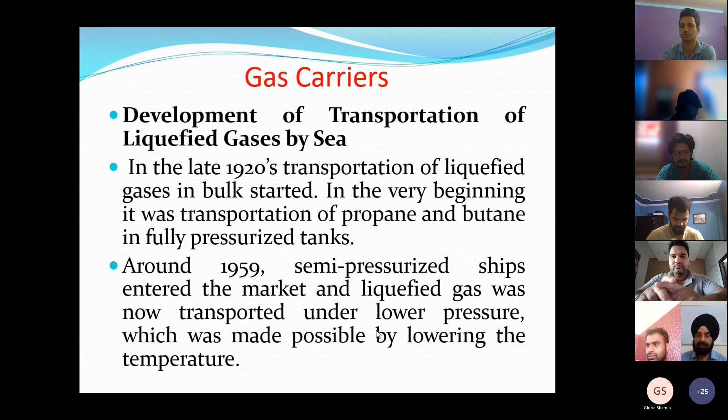So if you see the development of transportation of liquefied gases by sea, it started in the late 20s, and in the beginning only propane and butane were transported, and that too in fully pressurized tanks. Around 1959, after research, scientists found that certain gases can be liquefied if you lower the temperature, and then semi-pressurized ships entered the market and liquefied gas was transported under lower pressure, made possible by lowering the temperatures.

By 63, fully refrigerated ships for LPG, LNG and certain chemical gases were in service carrying cargo at atmospheric pressure but very low temperatures. So liquefied gas is divided depending upon these properties, and different groups of gases have led to different types of gas carriers. Certain gases are liquefied under high pressure, certain gases under low temperatures. That's why you have different types of gas carriers: some fully pressurized, some semi-pressurized, some fully refrigerated.

And as the development took place, the sea transport of these gases is internationally regulated with regard to safety through standards established by IMO. And these standards are set out in the gas carrier codes. So we all know that today you have codes on almost everything. But here in this gas carrier code, they give you everything, right from the design, construction, safety measures. And I feel today these ships are much safer as compared to other ships.

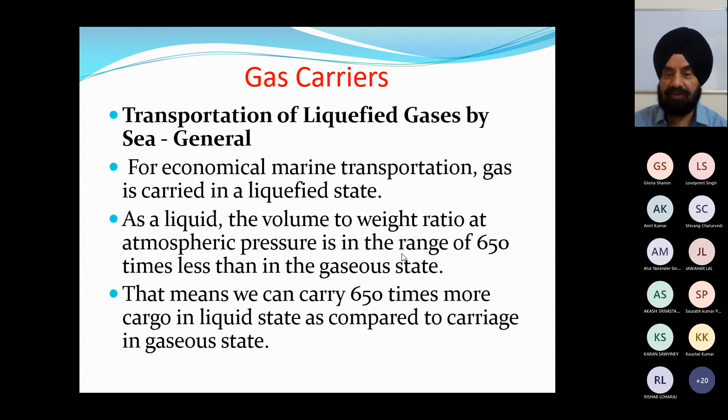Now if you see, for economical reasons, marine transportation of gas is carried in a liquefied state. If we had to carry this in a gaseous state, we would need very big ships. As a liquid, the volume to weight ratio at atmospheric pressure is in the range of 650 times less than the gaseous state. So again, the scientists did all this hard work, and today we can carry these gases in a liquefied state onto the ships, and that's how our life goes on. So this means we can carry 650 times more cargo in liquid state as compared to carriage of these gases in a gaseous state.

Now for these gas carriers, the temperature at which a gas condenses is a function of its pressure. And the combination of pressure and cooling is therefore fundamental to gas carrier design. That's how we liquefy this gas. Some ships carry gases liquefied under pressure and others under refrigeration. And also if you notice, the relative densities of these gases are low, varying from 0.4 for methane to 0.97 for VCM, vinyl chloride monomer, which is used in the manufacture of plastic. Cargo carrying capability is therefore more related to the volume capacity of the ship than the deadweight capacity.

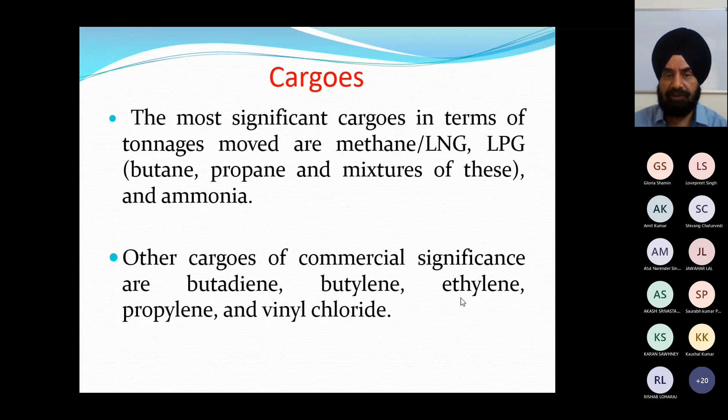Significant cargoes in terms of tonnage: LNG, LPG, butane, propane, ammonia, and other cargoes, of course, butylene, ethylene, propylene, and vinyl chloride. So apart from ethylene and methane, and what we call LNG is mostly methane, all these gases can exist as liquids at normal temperatures, whereas these gases are liquefied at very low temperature, -161 degrees centigrade. Now you can just imagine LNG ships carrying this liquefied gas at -161 degrees centigrade. So thinking of it, what type of material, how they must have constructed the tanks, and how this gas is liquefied under low temperatures.

Of course, technology is there today, and they may therefore be transported in pressurized cargo containment systems at any temperature up to the highest expected ambient temperature. So critical temperatures for ethylene and methane are below normal ambient temperatures, as I told you, -100, -160. And above the critical temperature, the gas cannot be turned into a liquid at any pressure and must therefore be cooled. That's why these gases are carried under various carriage conditions, either fully pressurized, semi-pressurized or fully refrigerated. And similarly, ethylene, methane or LNG are carried under fully refrigerated conditions because temperatures are -104 and -161.

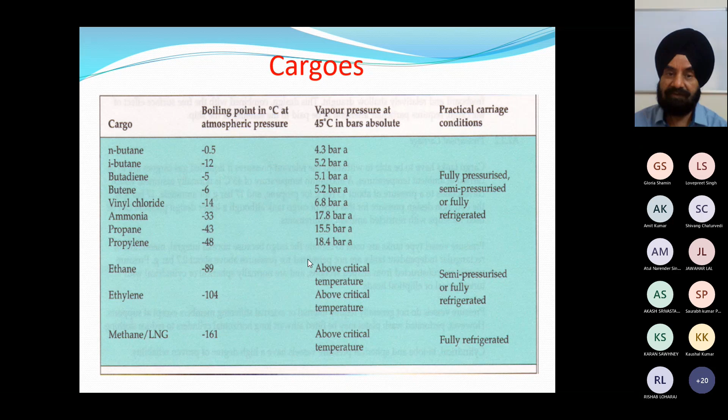And similarly, materials exposed to these gas cargoes should be resistant to any corrosive action of the gases. For this reason, copper alloys and brass have to be excluded from the cargo systems of ships intended for the carriage of ammonia. They have corrosive effects, and details of materials of construction which should not be used are in Chapter 17 of the IGC code. Everything is given there. Of course, people who build these things take care. They are intelligent, genius people who build the ships.

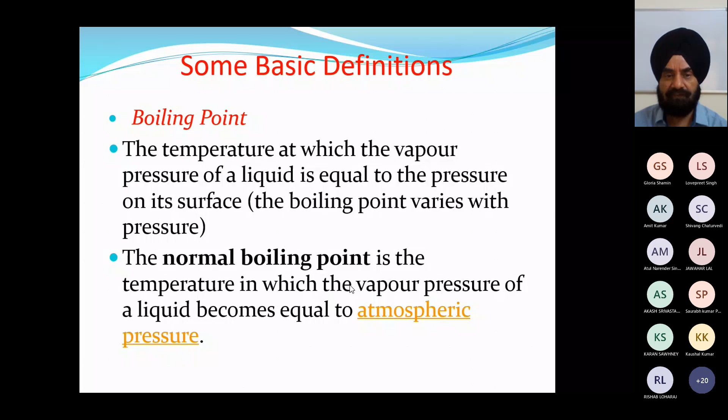Now, some basic definitions. Gas, again as per the gas carrier code, a liquid with a vapor pressure exceeding 2.8 bar absolute at a temperature of 100 degrees Fahrenheit is normally what we term a gas. Boiling point, as we all know, is the temperature at which the vapor pressure of a liquid becomes equal to atmospheric pressure. Cargo area, we all know, as compared to tankers, what is cargo area, what are safe zones, what are hazardous zones. And similarly, cargo containment systems are basically your tanks: the arrangement for containment of cargo, including where fitted primary and secondary barriers, associated insulation, and inter-barrier spaces.

Basically, in a very layman's term, the gas carrier is like a thermos flask. The inner barrier, the outer barrier, and in between there is insulation so that there is no temperature change. So it is based on that design, and of course we see all these primary and secondary barriers and the insulation in between. Gas dangerous space: all the deck area where your tanks, pumps, compressors, reliquefaction plant, everything is situated is known as the gas dangerous zone. And gas safe zone is space which is not designated as a gas dangerous zone.

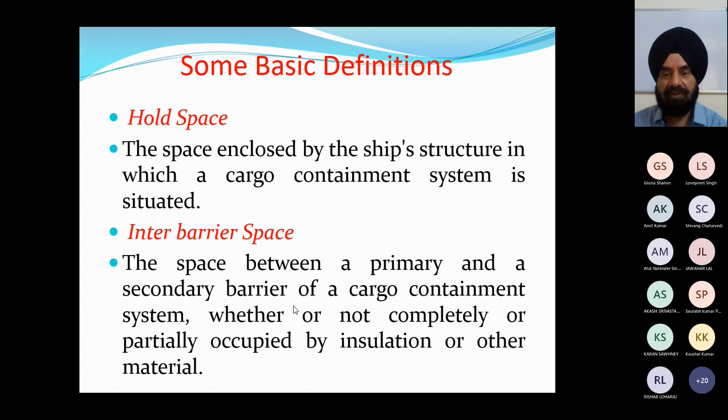Hold space and inter-barrier space. Again, if you see, these tanks are kept inside your hull, so naturally the hull is not forming a tank boundary. So the space between this tank and the hull is normally what we call the hold space. And inter-barrier space is between a primary and secondary barrier of a cargo containment system, whether or not completely or partially occupied by insulation or other materials.

MARVS, abbreviation for maximum allowable relief valve setting on the ship's cargo tanks, and these settings are normally stated in your ship's certificate of fitness. Primary barrier, like the thermos I told you, primary and secondary barriers. If you look at these tanks, this is the tank kept inside your hold space. Primary barrier, where you are loading the cargo, the inner layer, and again insulation is there, and in case the cargo leaks, finally you have the hull acting as a secondary barrier, and cargo should not go out. That is the whole issue. So that's why you have this primary and secondary barrier.

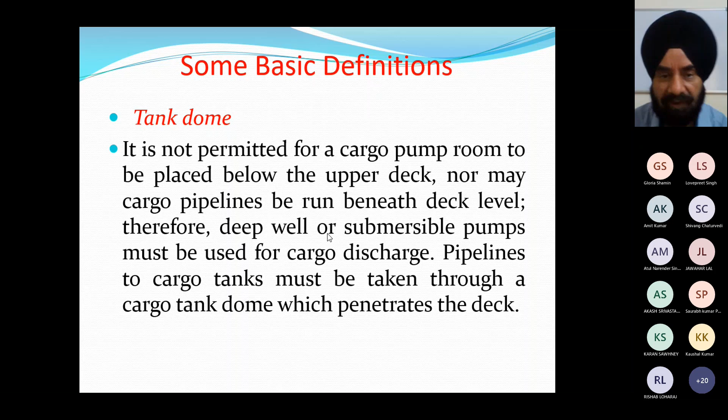Tank dome: of course all the pipelines, everything is fitted on deck. There's nothing under deck. Pumps are inside the tanks, and all these pipelines basically pass through what we call the tank dome. They are taken through the tank dome, which penetrates the deck.

Now comes the hazards. It can also be a common question. First of all, any cargo I am carrying, I should be aware of the hazards of that cargo. First of all, with this, personal hazards: flammability, toxicity, asphyxia, low temperature, frostbite.

When we are carrying these cargoes at such a low temperature, you can imagine even minus 50 degrees is a low temperature, and when we are carrying at minus 161, if a drop of that cold liquid falls onto any part of the body, we can imagine what can happen. It is worse than a hot burn. Chemical burns, we all are aware.

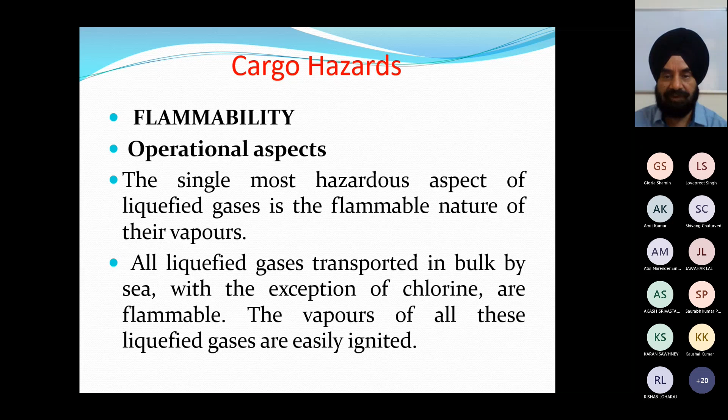The flammability, very simple thing. Whenever we carry these liquefied gases or even oil, the first thing that comes to mind is, of course, this will be flammable. And the single most hazardous aspect of these gases is the flammable nature of their vapors. We also know it's not the liquid which burns, it is the gas. The liquid gets converted into vapor, mixes with oxygen, and then combustion takes place. And the vapors of all these liquefied gases are very easily ignited. The exception is ammonia, which requires a little higher ignition energy.

Emergency aspects: because of very rapid evaporation of spilled liquefied gases, the flammable vapor spreads. If we just spill this liquid, it is immediately going to get converted to vapor. Even people who have carried naphtha on product carriers have seen how quickly it vaporizes. So liquefied gases get converted immediately into vapor, and the chance of ignition following a spill of liquefied gas is therefore much greater.

So that's why you find all terminals and ships, wherever you are working, are totally ignition-free zones. And by working on tankers or these ships, it becomes our nature that we do not allow any spark or any flame to come close to these areas.

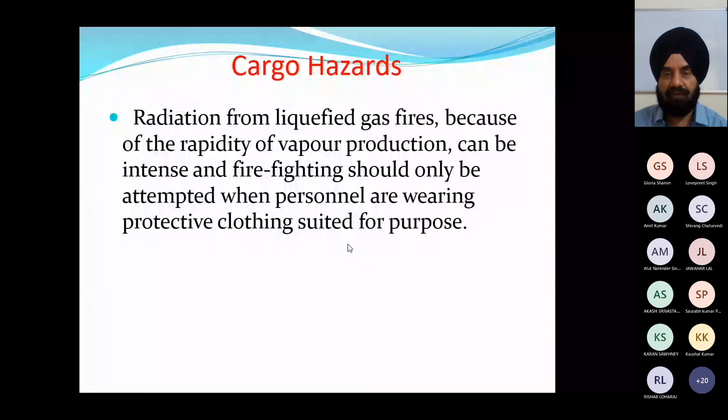Radiation from liquefied gas fires, because of the rapidity of vapor production, can be intense. So we cannot go and fight the fire in normal conditions as we do with other solid fires. So again, firefighting needs proper protective clothing. In case we come across such a situation, God forbid, before attempting we should have in mind that these are vapors and they spread very fast.

Toxicity, I think we all know; we have studied in chemicals the same effect of toxicity on human health. It can cause a permanent health hazard, irritation, tissue damage, impairment, and these can result from skin or open wound contact, inhalation or ingestion. Contact with cargo, liquid or vapor, should be avoided. Protective clothing is most important, and toxic gas detection equipment.

Asphyxia, very common with these gases. The human body requires 21% oxygen. So this asphyxia is just suffocation.

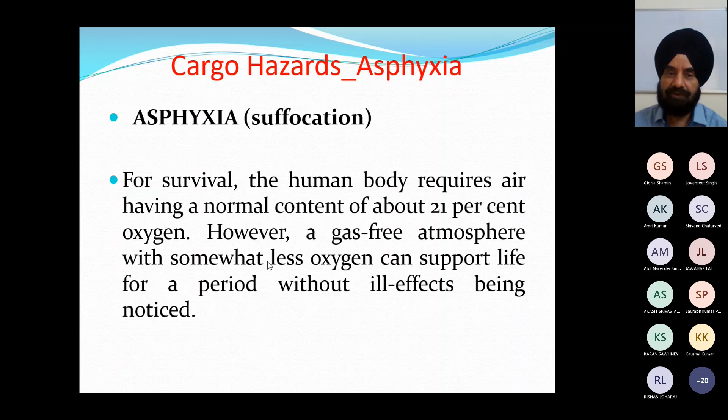So these gases, what do they do? They basically replace your oxygen. And if there is a deficiency of oxygen, you know what can happen to us. Susceptibility of persons to reduced oxygen levels varies, but at levels below about 19%... now we know we need 21% oxygen. At a little lower level, 20, 19, we can still survive, but you can start feeling the effect of this low oxygen, especially when you go to very high altitude. There also some people face a breathing problem because of the lower percentage of oxygen. So the same thing is here.

So in case the oxygen level goes below 16%, unconsciousness immediately takes place. So these gases have this effect when you are carrying them in any space. Oxygen is replaced, there is no oxygen. So the asphyxiant effect is very much present with these gases. Such a problem is limited to enclosed spaces.

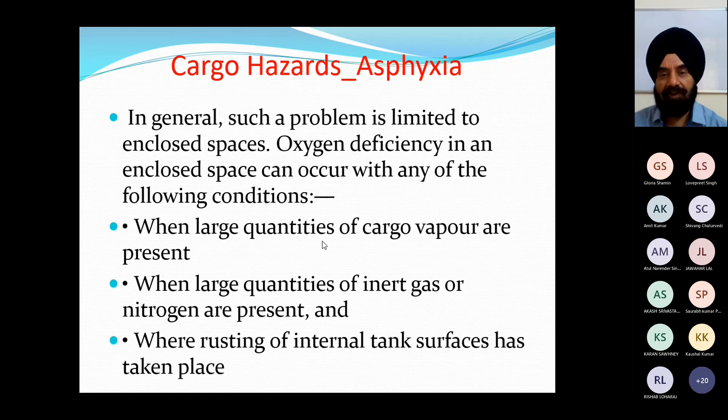Oxygen deficiency in an enclosed space can occur when large quantities of cargo vapor are present, large quantities of inert gas or nitrogen are present, and where rusting of internal tank surfaces has taken place. So when tanks are empty, they may be in an inert condition, or when they are full, they may be full of these gas vapors. So it is essential to prohibit entry to any space until the oxygen content is 21% at different levels and widely dispersed within the space.

Now, of course, this is asphyxiation and medical treatment. I think you have studied enough in the first aid or MFA or medical care courses about what to do in case a person is suffering from the loss of oxygen. So the first thing is to remove the casualty to a safer area where he can get more fresh air.

Now another effect is anesthesia. The anesthetic effect is also there. What is anesthesia? It is simply loss of consciousness, the effect on the nervous system. As medical officers on ships, we all know what anesthesia is. If we have to do some repair on the human body, we definitely give anesthesia, local anesthesia. If you want to do stitching also, the doctors give this. So these gases have the same effect of anesthesia, loss of consciousness due to the effect upon the nervous system. The unconscious person may react, but can only be roused with great difficulty. Again, this can be avoided by use of cargo vapor detection equipment and breathing apparatus.

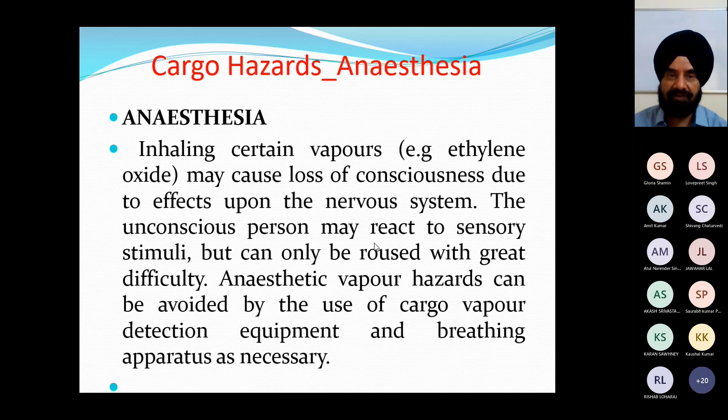Frostbite: the extreme coldness of some of these liquefied gases is a significant hazard. And it is quite dangerous. It's not that it gives you only a burn; your cells start dying, and we get gangrene, and then that particular part may need to be amputated. So frostbite is a very dangerous thing, so better we take this hazard very seriously. For fully pressurized gases, while the containment system will normally be at or near ambient temperature, liquid leaks will quickly flash to fully refrigerated temperature. Such areas should never be approached without proper clothing.

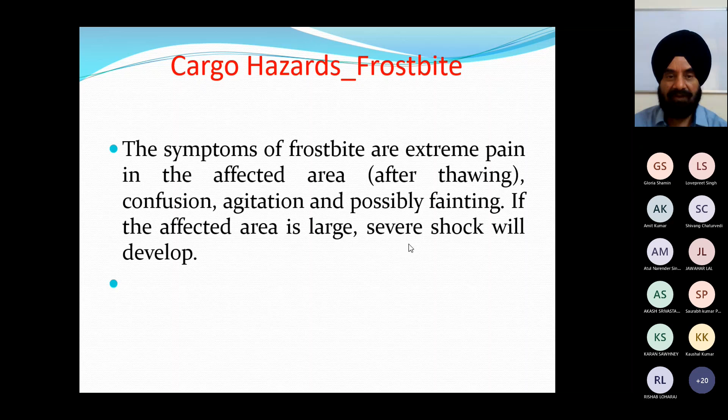Symptoms of frostbite: extreme pain, confusion, agitation, and possibly fainting. And if the affected area is large, severe shock, and it can even cause death. Frostbite is common; a lot of engineers suffer when they're handling the refrigeration system on the ship, if they touch a very cold pipeline. So they see these cold burns. Similarly, the skin initially becomes red, then turns white. The affected area is usually painless, hard to touch, and if left untreated, the tissue will die and gangrene may occur.

And of course, treatment is to warm the area, warm the particular affected portion. Blisters should never be cut nor clothing removed. Dress the area with sterile gauze. And of course, immediate medical attention. But the worst thing is if it is left untreated, thinking it will get better on its own. The tissue or cells dying, that gangrene is a very dangerous disease. It needs amputation to save the body.

Chemical burns: we are also exposed to ammonia, chlorine, ethylene oxide, and propylene oxide. Their symptoms are similar to burns by fire, except the product may be absorbed through the skin. Ammonia is a gas. I went on one of the ships, and the ship was full of that ammonia smell.

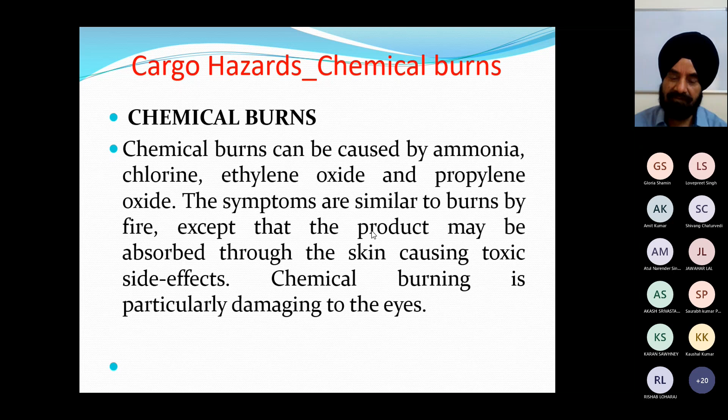Again, burning pain, redness of the skin, irritating rash, blistering of skin, and toxic poisoning, all associated with ammonia. Treatment - eyes and skin should be attended to first. Wash with copious amounts of water, wash the skin thoroughly. On gas carriers authorized to transport these products, that's why you have deck showers and eye baths provided for water dowsing. Their location should be clearly indicated. In case of emergency these things become important - as a chief officer you must ensure these systems are working properly. Of course we don't expect anything happening, but God forbid something happens, the amount of water available through deck showers is the first thing needed to wash the affected area. Those were the personal hazards.

Now if you see the other hazards as compared to what we have studied in the chemical tankers, here also we have reactivity.

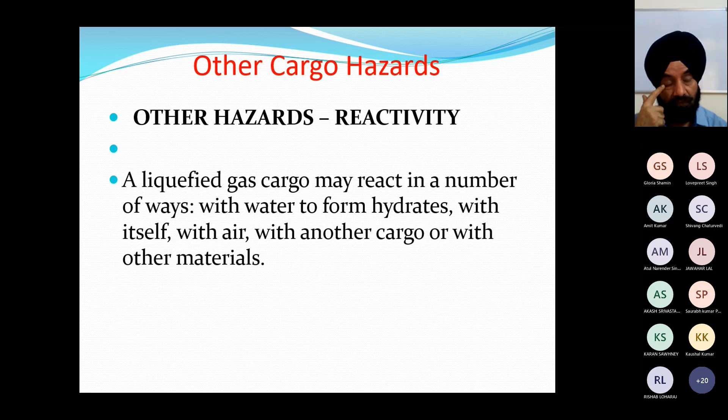Liquefied gas cargo may react in a number of ways. It can react with water to form hydrates, which is again not a good thing. So you can imagine, in a tank when we are carrying these gases at such low temperature, if there are a few drops of water, they can freeze - this is known as the formation of hydrates. These crystal formations can definitely be damaging to the pumps, bearings, anything. So the first danger with these gases is reactivity - they can react with water, react with air, or react with another cargo or other materials, similar to chemical tankers.

Reaction with water - some hydrocarbon cargoes will combine with water under certain conditions to produce a substance like a hydrate, resembling crushed ice or slush. Water for hydrate formation can come from purge vapors with an incorrect dew point, water in the cargo system, or water dissolved in the cargo.

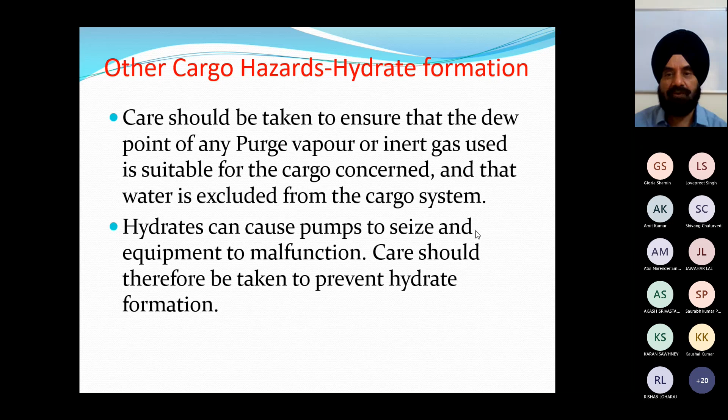Care should be taken to ensure that the dew point of any purge vapor or inert gas used is suitable for the cargo concerned, and water is excluded from the cargo system. Otherwise hydrates can cause pumps to seize and equipment to malfunction. We'll see how these things are taken care of through procedures before loading takes place - what all things are done to get rid of any water present in the tanks.

Certain cargoes like LPGs may contain traces of water when loaded. It may be permissible in such cases to prevent hydrate formation by adding small quantities of antifreeze. Of course, anything related to the terminal - normally we don't add anything to the cargo ourselves, it is the shipper or the terminal who has to do it. It is permitted, it should be introduced at places where expansion occurs with a resultant lowering. Antifreeze additives are often flammable and toxic, so care should be taken. Of course, on the ship we don't mix anything with this.

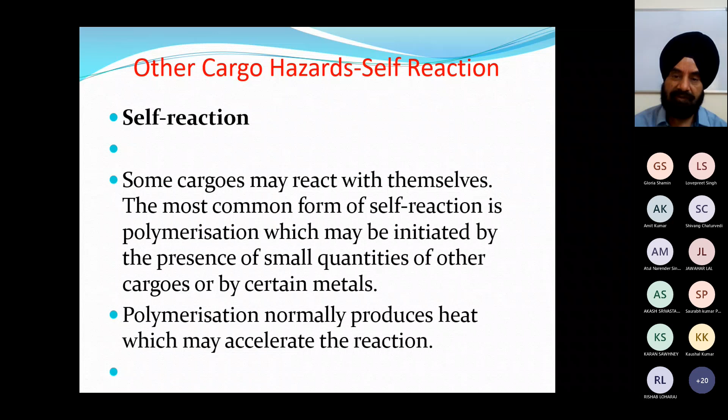Self-reaction - some cargoes may react with themselves. The most common form is again polymerization. These are liquid cargoes - if you consider, these are gases but they have been liquefied, now it's a liquid, so they can have a self-reaction. Self-reaction is a vigorous polymerization which may be initiated by the presence of small quantities of other cargoes or by certain metals. Polymerization, as we have studied, produces heat which can accelerate the reaction, and then the temperature and pressure go up.

Now if these cargoes are such, the solution for how to carry them is again under an inert gas blanket, or to be inhibited - an inhibitor is added so that this reaction doesn't start. And if it is done, you should have data on what is the quantity and type of inhibitor added and how long its effectiveness will last. Also the action to be taken should the voyage exceed the effective lifetime of the inhibitor, and any temperature limitations. Of course there is no need to add anything during the voyage - if it should become necessary, it should be done according to the shipper's instructions. So we don't touch this cargo, we don't want to spoil it, and we don't have the means on the ship to do it anyway.

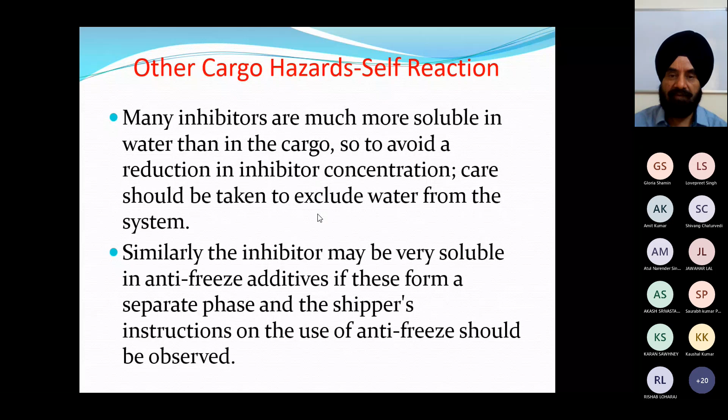This is similar in too much detail to what we have studied in chemical cargo - same thing, reaction with air. This is also very much possible with these liquefied gases, and they can react with air to form unstable oxygen compounds.

The rectification for this is how we carry cargo under nitrogen. Removing oxygen - we are very much thorough with inert gas, but normally we don't use inert gas, we use pure nitrogen, so the chances of reaction with oxygen are absolutely reduced.

Reaction with other cargoes, of course, certain cargoes can react dangerously with one another. They should be prevented from mixing, using separate piping, vent systems, even their vapors. Every tank has an individual venting system so that no two cargoes' vapors mix and create any disaster on the ship.

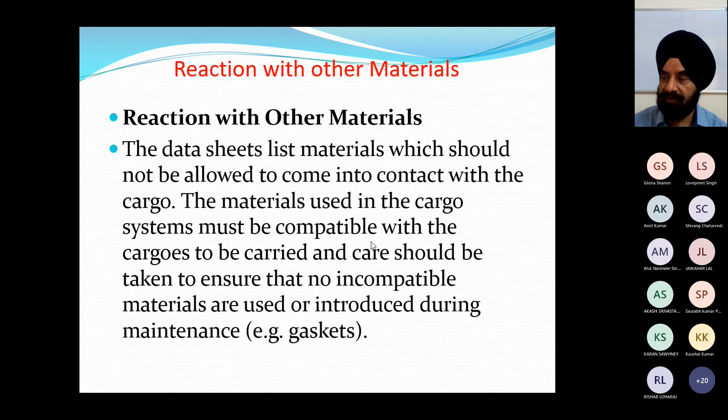Data sheets list materials which should not be allowed to come in contact with the cargo. MSDS sheets clearly give materials used in cargo systems that must be compatible with the cargoes to be carried, and care should be taken that no incompatible material, like gaskets, pump seals, anything used for maintenance, is made in such a way that it reacts with these liquefied gases.

Reaction can occur between cargo and purge vapors of poor quality. Inert gas with high CO2 content can cause carbonate formation with ammonia. Reaction can also occur between compressor lubricating oils and some cargoes. So for this, inert gas is probably replaced with nitrogen so that no carbonate formation takes place.

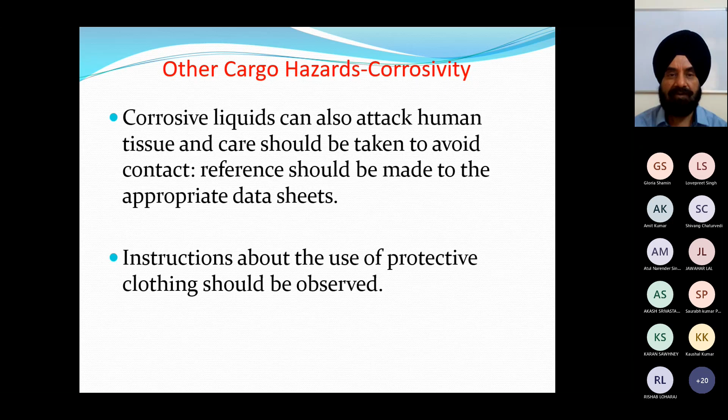Corrosivity - some cargoes and inhibitors may be corrosive, so care should be taken to ensure unsuitable materials are not introduced. Corrosive liquids affect both human tissue as well as equipment. During building time, they take care of what all cargoes the ship is carrying, authorized and approved to carry, and for touching these corrosive liquids, proper protective clothing is the solution.

Low temperature effects are also there. The liquefied gas cargoes are often shipped at very low temperatures, so important temperature sensing equipment must be well maintained. A lot of sensors and gauges are on these ships, and they have to work to maximum accuracy. A low temperature effect is brittle fracture.

I can imagine if minus 100 or minus 150 degree liquid falls on deck, it will immediately cool the deck or steel to such a low temperature that the metal becomes brittle. What is brittleness? It just breaks.

And that's why steel decks, when this so-called liquid falls on the deck, it can create brittle structure, brittle fracture. Normal shipbuilding steels rapidly lose their ductility and impact strength below 0 degrees. So you can imagine the material used for construction of tanks to carry these liquefied gases at such low temperatures.

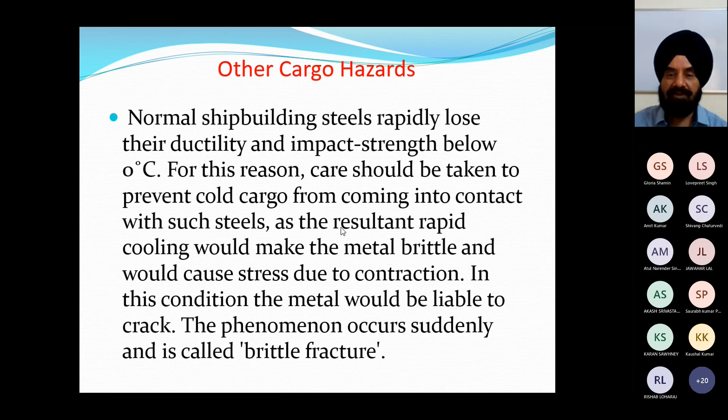For this reason, care should be taken to prevent cold cargo from coming into contact with such steels, as the resultant rapid cooling would make the metal brittle and cause stress due to contraction, and in this condition the metal will be liable to crack. So this is a precaution we have to take, that these cold cargoes do not spill on deck, and if they spill, there are chances the metal becomes brittle and can crack.

Spillage - we must avoid hazard to personnel and danger of brittle fracture. If spillage does occur, the source should first be isolated and the spilt liquid then dispersed. Cool down - systems are designed to withstand a certain service temperature. If this is below ambient temperature, the system has to be cooled down to the temperature of the cargo before transfer.

We will see how these tanks are cooled down. From ambient temperature, if I am going to load cargo at even minus 100 degrees, we just cannot put this cargo into the tanks directly - thermal stresses will take place, brittle fracture can take place.

So these tanks are normally cooled at about 10 degrees per hour. You cannot cool immediately - sudden cooling also causes a lot of thermal stresses. So we'll see during the procedures of cargo operations how this cooling of tanks is done.

Ice formation - low cargo temperatures can freeze water. As we have seen with hydrate formation, to avoid that, antifreeze or similar substances can be added.

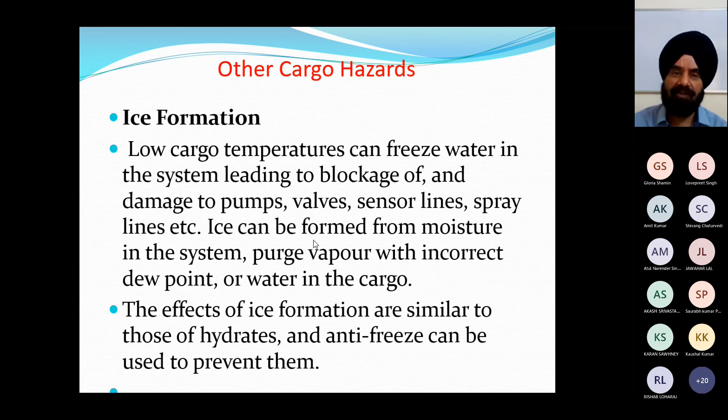Now the biggest thing is rollover, which is associated with these cargoes, and this is an important exam question. A lot of the time in the writtens and even in orals, the examiner probably will ask you what rollover is. Now, rollover is a very simple thing to understand - you are carrying these liquefied gases in a tank.

Now with a slight temperature change, vaporization starts, what we call the boil off. This liquid starts vaporizing - the term used is boil off. Now as the top surface, the top layer of the liquid vaporizes, the density of that top layer changes. It becomes denser and denser, and sometimes these cargoes have a lot of impurities, which start vaporizing very rapidly, making the top layer a little denser compared to the layers beneath. This layer formation is what we call stratification.

Now the stratification develops - the liquid layer adjacent to the liquid surface becomes denser than the layers beneath due to the boil off of a lighter fraction from the cargo. Especially with LNG methane, which has a lot of impurities, these impurities immediately boil off and vaporize, and the top surface of the liquid becomes denser.

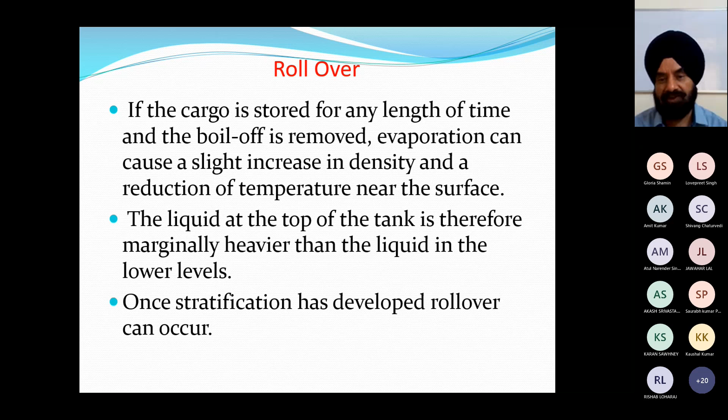If the cargo is stored for any length of time and the boil off is removed, evaporation can cause a slight increase in density and a reduction of temperature near the surface. So the liquid at the top of the tank is therefore marginally heavier than the liquid in the lower levels. This layer formation, or stratification, has developed and rollover can occur.

Now what is the solution for this? This inversion will be accompanied by a violent evolution of large quantities of vapor and a very real risk of tank overpressure.

Rollover has been experienced ashore also, but may happen on a ship that has been anchored for some time. That means this rollover can take place when your cargo is almost stationary, not moving. It can happen - like if the ship is stationary at anchor, then there is a possibility.

So for its prevention, such circumstances are foreseen. The tank content should be circulated daily by cargo pumps to prevent this rollover from occurring. So if the cargo is recirculated, then there are no chances of this layer formation. So this is basically rollover - what it is and how it can be avoided.

It can also occur if similar or compatible cargoes of different densities are put in the same tank. That can also happen.

So these were our hazards - personal and reactivity hazards, and rollover. Now we come to gas carrier types. What are the various gas carriers? This question also comes in exams. Simple - even if you have not been on a gas carrier, it doesn't make a difference. We can definitely answer this question: gas carriers can be grouped into 5 different categories.

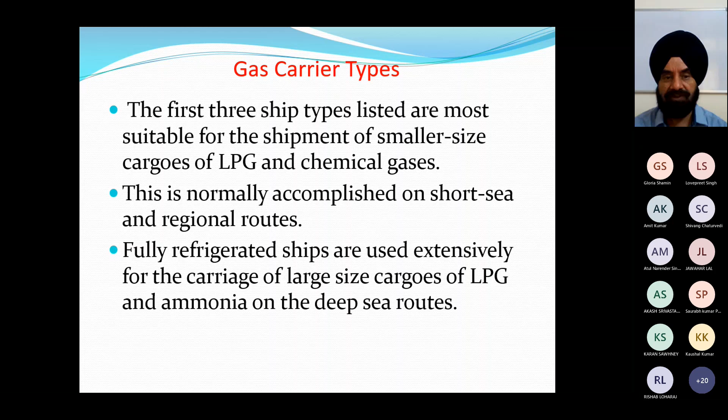Now, the first 3 types listed are most suitable for shipment of smaller size cargoes of LPG and chemical gases, normally on short sea routes, and fully refrigerated ships are extensively used for carriage of large size cargoes of LPG and ammonia on deep sea routes.

Now, what are fully pressurized ships? From the word itself we see the cargo is at high pressure. If you have to carry cargo at high pressure, the tank should be of thicker steel, and if you use thicker steel, naturally the tanks will be heavy. So these fully pressurized ships, the simplest of gas carriers, carry cargoes at ambient temperature but at high pressure. The temperature is the same as your LPG cylinder at home. The cargo is at normal temperature, but it is under high pressure.

So they are fitted with type C tanks, what we call pressure vessels, fabricated in carbon steel. These tanks can stand 18 bar gauge. 18 bar pressure means the wall thickness of this material must be sufficient. Few ships in service with higher design pressure can accept up to 20 bar gauge. No thermal insulation and no reliquefaction plant is necessary for these types of ships.

Cargo can be discharged using either pumps or compressors, and because of their design pressure, the cargo tanks are extremely heavy, since they are made of thicker steel. As a result, fully pressurized ships tend to be small, having cargo capacity of 4,000 to 6,000 cubic meters, and are primarily used to carry LPG or ammonia. Ballast is carried in double bottoms, and these ships are fitted with a type C containment system, so no secondary barrier is required.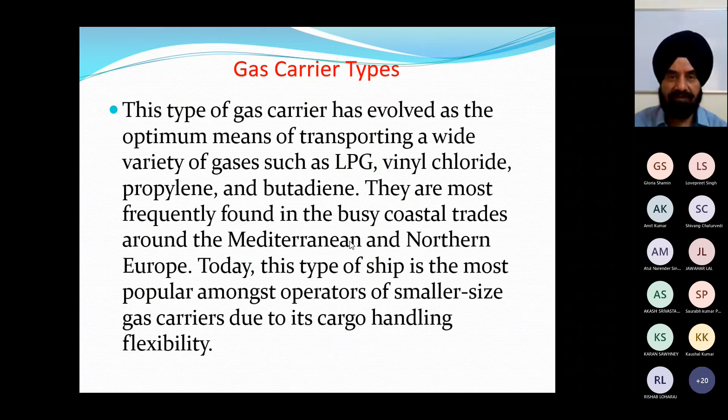semi-refrigerated. This type of gas carrier is an optimum means of transporting a wide variety of gases such as LPG, vinyl chloride, propylene and butadiene, most frequently found in busy coastal trades in the Mediterranean and Northern Europe. These semi-pressurized ships are the most popular among operators. The tanks are type C, which we will see when we study type A, B and C tanks, and therefore do not require a secondary barrier.

Cargo capacities are 3,000 to 20,000, and tanks are usually made from low temperature steels, because we are loading the cargo at low temperatures. So the tank construction should stand low temperature and also a 5 to 7 bar pressure. Normally the material used can easily stand -48, which is the temperature suitable for most LPG and chemical gases.

Alternately, they can be made of special alloy or aluminium to allow carriage of ethylene at -104. Ethylene ships are specially designed so that this cargo is carried at -100 to -104, and to load from both pressurized and refrigerated storage facilities. So that is pressurized and semi-pressurized. The third is ethylene ships. They are often built for specific trades, carrying LPGs or chemical gases.

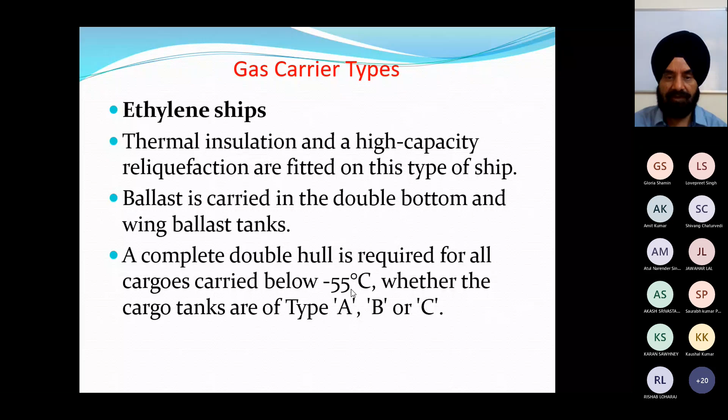Basically, with sudden temperature changes the cargo vaporizes, and to control these vapors we convert them back into liquid; that is a reliquefaction plant. It is possible up to ethylene, but for lower temperatures the plant becomes bigger and bigger. A complete double hull is required for cargoes below -55, whether type A, B or C tanks are carried.

Fully refrigerated ships carry their cargoes at approximately atmospheric pressure and are designed to transport large quantities of LPG and ammonia. Here 4 different cargo containment systems have been used, because they are fully refrigerated, with special metal and special construction: independent tanks with single hull, double bottom and hopper tanks; independent tanks with double hull; integral tanks incorporating a double hull; and semi-membrane tanks.

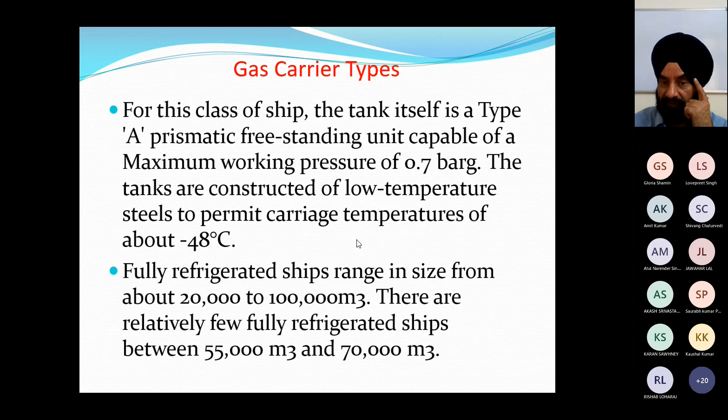For this type of ship, the tank itself is a type A prismatic freestanding unit with a very low maximum working pressure of 0.7 bar. The tanks are constructed of low temperature steels to permit carriage of cargo down to -48, and fully refrigerated ships are bigger, ranging from 20,000 to 100,000 cubic meters, relatively few between 55,000 and 70,000 cubic meters. After ethylene comes LNG; these are also fully refrigerated, but here the temperature is quite low.

Anybody worked on these LNG ships? LNG carriers? Yes, what do you say? Is there anybody who has worked on LNG ships? No one, nobody?

Okay. LNG carriers are specialized types of gas carriers built to transport large volumes of LNG at -162 degrees. So these ships are practically bigger in size, 125,000 to 335,000 cubic meters capacity, normally dedicated to a specific project, and they remain so throughout their life. They carry only between 2 or 3 ports, and they are designed so that they keep feeding that particular plant or project.

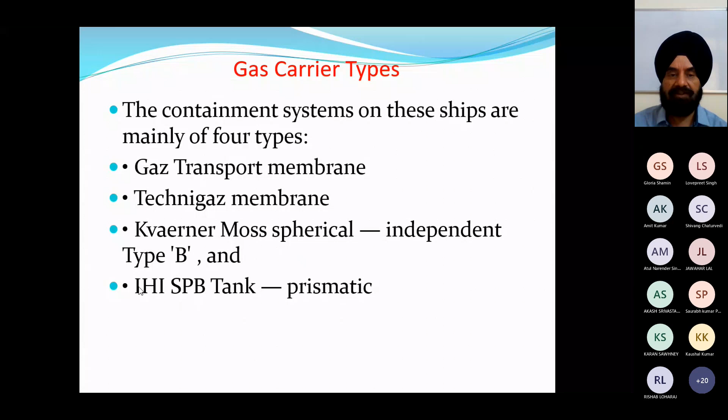The containment system on these ships is basically of 4 types. Containment system means your tanks: Gaz Transport membrane, Technigaz membrane, Kvaerner-Moss spherical, and IHI SPB prismatic tanks. So these are the 4 types of tanks. Of course, the details of the different types of tanks for LNG are there in the IGC code.

So LNG ships have double bottoms or double hulls throughout their cargo length, which provide adequate space for ballast. Ships fitted with membrane systems have a full secondary barrier. The membrane is a very thin material, and they have a primary and secondary barrier, and type B designs have drip tray pan type protection.

Now, a characteristic common to all LNG ships is that they burn their cargo boil-off. The liquid which gets converted to vapor cannot be converted back to liquid because you need a very big reliquefaction plant, which is not possible on the ship. So that's why they burn these LNG vapors. What we call the boil-off of LNG is taken as a fuel.

Hold spaces around cargo tanks are continuously inerted, except in the case of spherical type B containment, where hold spaces may be filled with dry air provided there is an adequate means of inerting. Most LNG carriers have steam turbines because they want to burn this boil-off of the cargo. So these LNG ships go back to steam: the boiler heats up steam, and then the steam turbine.

Cargo containment system means the tanks, which types of tanks are there. Questions can often come on this: what are the various types of tanks you have, and what this system for containing cargo includes, where you have the primary barrier, secondary barrier, thermal insulation, intervening spaces, and adjacent structure for support of these elements.

So cargo containment means the cargo should not leak out in case of any structural damage or leakage. The cargo should not spill out because it will definitely be harmful to the environment. So that is the whole idea, how to contain. Like in chemical tankers, we do the same thing, where the tanks are kept away from the hull, and in case leakage takes place, that's why these primary and secondary barriers are fitted.

So first among these come your independent tanks. These are the simplest ones, completely self-supporting, and do not form part of the ship's hull structure. The tank is simply kept in your cargo hold. Moreover, they do not contribute to hull strength, so they will not form any structural member of the ship. As defined, depending mainly on the design pressure, there are three different types of independent tanks: type A, B and C. So we will see this.

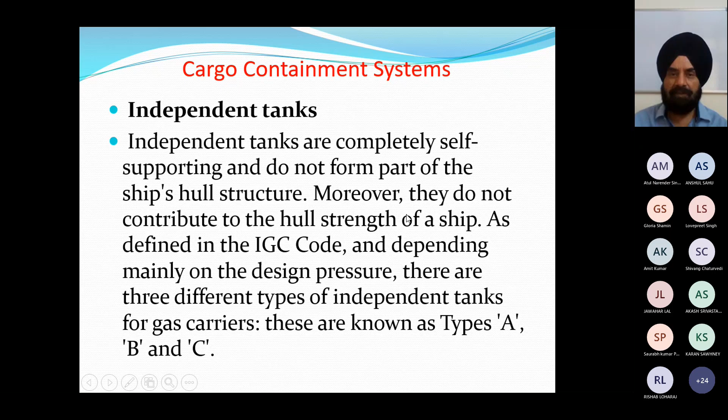Yes, sir. चलो ये तो बच्चे आप पढ़ लेना. This is the various type of tanks. So briefly I have described all here.

इसके बाद आपका next आ जाता है the survival capability or what we call the tank location. So these are the different tanks, integral tanks और क्या क्या होते हैं. So survival capability and tank location.

What exactly this is: the ship subject to the code shall survive the hydrostatic effects of flooding when hull damage caused by some external force takes place. So इसके लिए, same like if ships run aground or stranding or anything, the cargo should not spill out.

So in addition to safeguard the ship and environment, the cargo tank shall be protected from penetration in case of minor damage to ship resulting, for example, from contact with jetty or tug, and also given a measure of protection from damage in case of collision or grounding by locating them at specified minimum distances inboard from the ship's shell plating. So chemical में भी यही था.

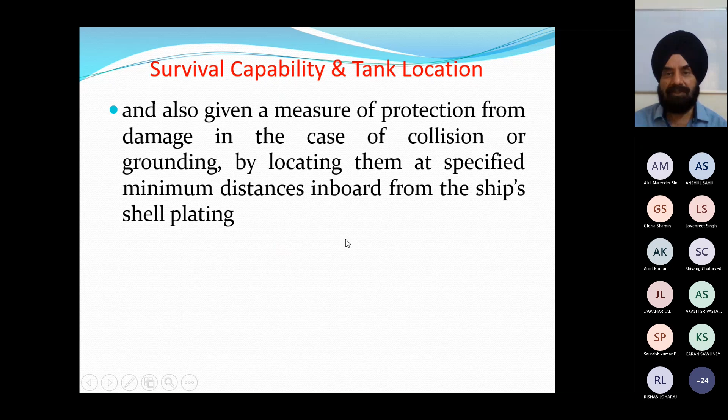यहाँ पे भी again your survival capability: the ships subject to the code are designed to one of the following standards, what we call 1G, 2G, 2PG and 3G. So these ships are intended to transport products indicated in chapter 19 that require maximum preventive measures to preclude their escape. So again their location, if you see in the IGC code, how far they should be located from the hull and all the distances, details are given, which is taken care during the

building time. But इसकी knowledge भी कि survival capability is then only possible if the ship gets damaged, cargo tanks do not get damaged. So that is how their design is made. Type 2G, again intended to transport products indicated in chapter 19 that require significant preventive measures. यहाँ पे maximum preventive and significant to preclude their escape.

And 2PG is a gas carrier of 150 meter in length or less intended to transport the products that require significant preventive measures to preclude their escape, and where products are carried in type C independent tanks with MARVS of at least 0.7 megapascal gauge and a cargo containment system design temperature of -55 or above. A ship of this description that is over 150 in length is to be considered as type 2G ship.

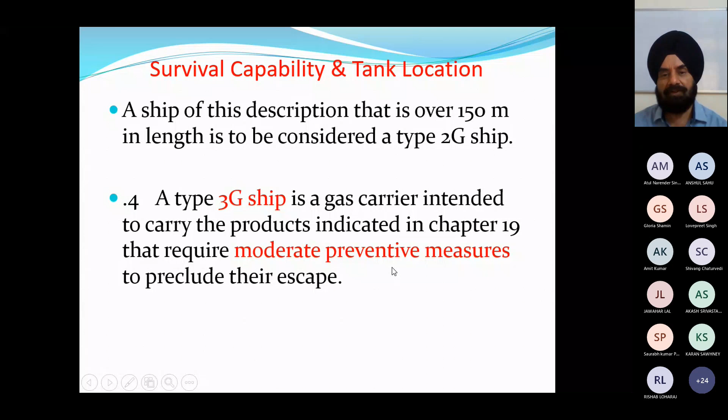And similarly type 3G ship is a gas carrier intended to carry products which require moderate preventive, means less preventive measures. So उनके distances जो हैं आपके accordingly less हो जाएंगे. So therefore 1G ship is a gas carrier intended for transportation of products considered to present greatest overall hazard, and type 2G, 2PG and type 3G for products of progressively lesser hazards.

So this is to understand survival capability, what do they mean, and accordingly type 1G ship shall survive the most severe standard of damage and its cargo tank shall be located at maximum prescribed distance inboard from the shell. And ship type required for individual products is indicated in column C of chapter 19.

And a ship intended to carry more than one product listed in chapter 19, उसका standard again for the worst one, or the most stringent type of ship जो type का cargo carry करना; if extensive precautions are required, then you will have 1G type. In case the ship is carrying 1G, 2G, she should be built according to the 1G specifications.

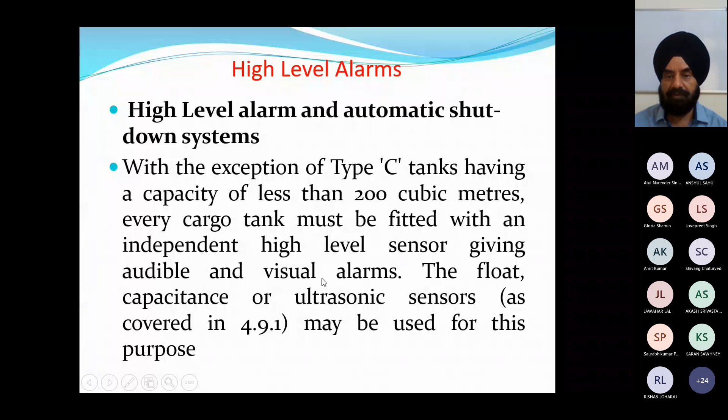अभी आपके high alarms: of course these ships have lots of gauges and alarm sensors fitted, even for the automatic shutdown. So with the exception of type C tanks having capacity of less than 200 cubic meters, every cargo tank must be fitted with an independent high level sensor giving audible and visual alarm. So this is again for the safety that a high level alarm or other independent sensor is required to automatically stop the flow of cargo.

But यहाँ पे again है कि there should not be any pressure surge. So the timing of that valve should be so adjusted that there is no overflow, at the same time there is no damage to the pipeline due to the pressure surge.

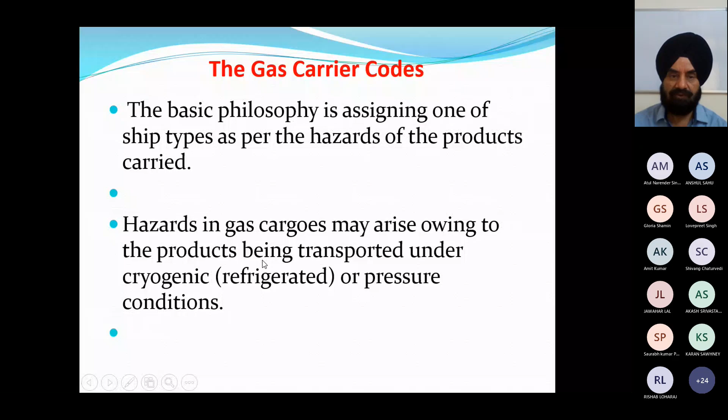Gas carrier codes: ships have been transporting gas for so many years, and as the technology keeps changing, the purpose of this code is to provide standards for safe transport, and this is done by the code prescribing design and construction standards. So अगर आप देखिए, the basic philosophy is assigning one of the ship types as per the hazards of the products carried. Hazards in gas cargo arise due to the products being transported under refrigerated or pressure conditions.

So इसी के हिसाब से आपके gas carrier code जो हैं, which of course they keep amending as per the new innovations taking place. Severe collision or strandings could lead to cargo tank damage and uncontrolled release of product. Such release could result in evaporation and dispersion of the product, and in some cases could cause brittle fracture of the hull. So requirements in these codes are intended to minimize these risks depending on the present technology.

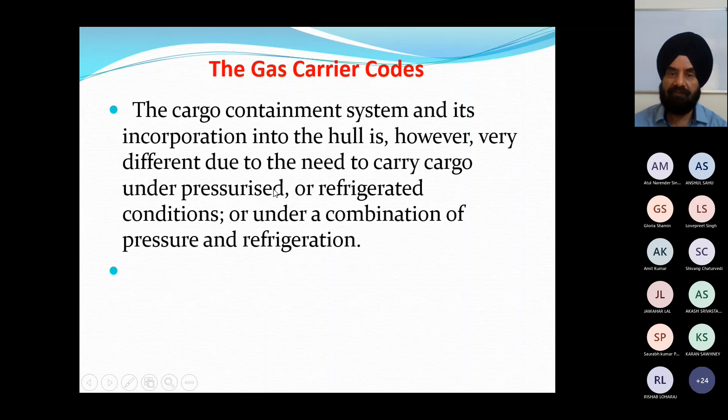Its layout of this code is in line with your chemical code, like the IBC. Overall layout of a gas carrier is similar to that of a conventional oil tanker from which it evolved, and the cargo containment system and its incorporation is however very different due to the need to carry these cargoes under high pressure or refrigerated conditions. This is what makes it different.

Now this code, again for gas carriers built before or built after June 86: the IGC code applies to new gas carriers built after 30th June of 86. This code for construction and equipment of ships carrying liquefied gases, in short we call it the IGC code, is mandatory for all ships, and as a proof of which code the ship complies with, GC code or IGC code, you have the certificate of fitness. If you have the international certificate of fitness for carriage of liquefied gases on board, that indicates you are complying with the IGC code.

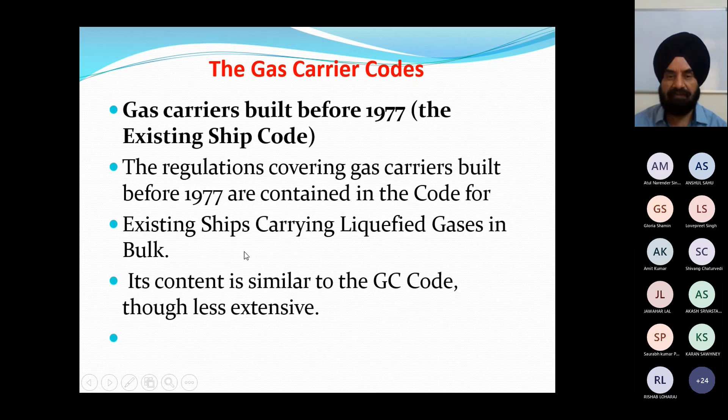And the ships built before used to have the GC code, regulations covering carriers built after 76 but before 86. Same thing, construction and equipment, and the certificate for these, there it was the word international, here the word international is removed. That means this is complying with the old code. Ships built before 77, the existing ships, their content is also similar to the GC code. So when you look at the certificate of fitness, you will know whether your ship complies with the GC code or IGC code.

IGC code, of course, is a little stringent because you have to comply with more things. So old GC code ships are either scrapped for a new ship instead of fitting the new things. The certificate remains valid dependent on the results of survey for a period of 5 years, assuming the ship has not changed flag, and where the ship is designed in accordance with the new IGC code, we have the International Certificate of Fitness for carriage of these gases. Such certificates signify a minimum standard of constructional safety. If it is international, I know we are complying with all the regulations of IGC.

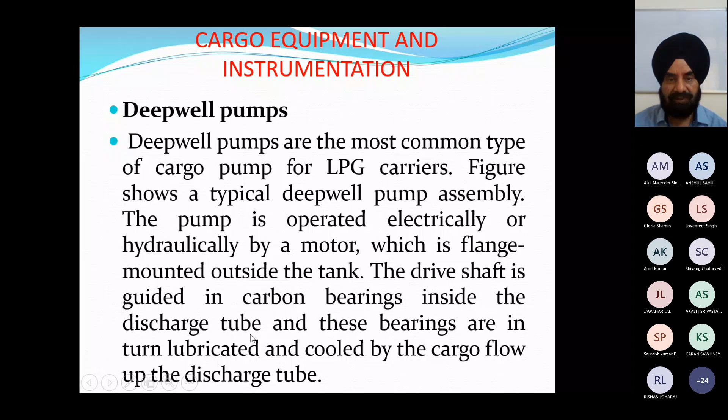Now in these ships we have two types of pump: deep well pumps and submersible. Deep well pumps, the most common type, are operated electrically or hydraulically by a motor which is flange mounted outside the tank. The drive shaft is guided in carbon bearings inside the discharge tube, and these bearings are lubricated and cooled by the cargo flow in the discharge tube. In chemical we have only one impeller; here you have 3 stage impellers which push the liquefied gases out.

This deep well pump's impeller assembly is mounted at the bottom of the cargo tank and will frequently comprise 2 or 3 impeller stages together with a first stage inducer, an axial flow impeller used to minimize the NPSH, net positive suction head, requirements for the pump. Shaft sealing arrangement sometimes comes as a question too. Write short notes on the deep well pumps used in cargo handling.

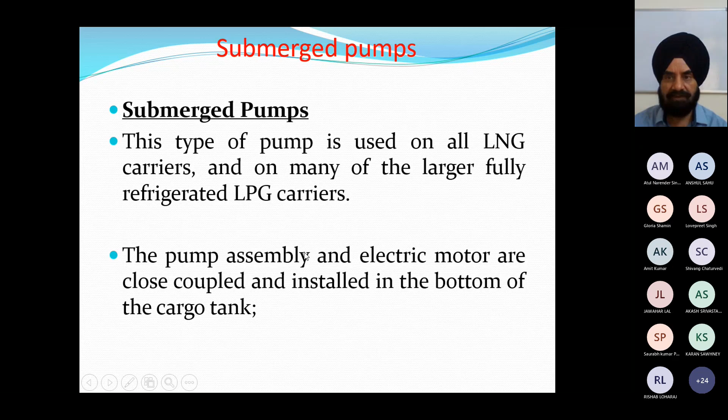Second, submerged pumps. This type of pump is used for LNG carriers and many large fully refrigerated ships. Its assembly is different. The pump is situated inside and well protected. Power supply to the pump motor is through copper or stainless steel sheathed cables which pass through a gas tight seal in the tank dome and terminate in a flame proof junction box. Submerged pump motors are cooled and lubricated by cargo, and this is how submerged pumps look. Everything is inside.

Now the reliquefaction plant, on which questions are common. What is a reliquefaction plant and how does it control the boil off of cargoes? With the exception of fully pressurized gas carriers, means must be provided to control cargo vapor pressure in cargo tanks during loading and on passage. In LPG and chemical gas carriers, a reliquefaction plant is fitted for this purpose, designed to perform the following functions.

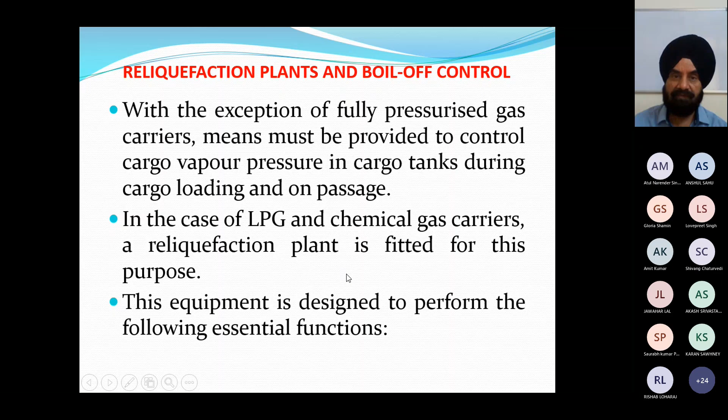To cool down the cargo tanks and associated pipelines before loading. Second, to reliquefy the cargo vapor generated by flash evaporation, liquid displacement and boil off during loading, and to maintain cargo temperatures and pressure within prescribed limits at sea by reliquefying the vapors generated inside the tanks.

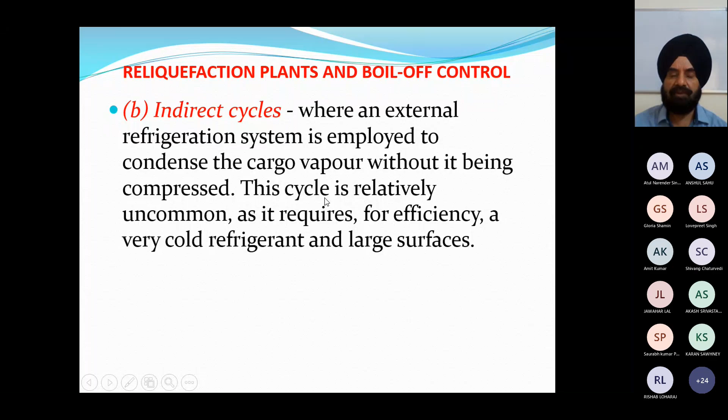And indirect, where external refrigeration system is employed to condense the cargo vapor without being compressed. So ये थोड़ा कम है. So direct system में भी अगर आप देखिए, there are 3 types in the direct cycle system. One is single stage direct cycle.

ये क्वेश्चन भी आपको आता है, what is reliquefaction of liquefied gas carriers and how it is done on the gas carriers, or what are the various types, describe any one of them. So be careful when he writes various types. You can describe the various types but describe only one of them. Sometimes I have seen the people describe all 3 of them. This is again a waste of time. In case if he is asking only one, then we describe only one. So इसमें 3 types हैं.

One is single stage, very simple, cargo tank, and there the vapors are there. Now these vapors are basically sucked by the compressor. Here the vapors are compressed, same like normal refrigeration system. But again temperature, pressure goes up, and then it is cooled in the seawater cooled condenser, and then they are passed through expansion valve. There basically they get converted into the liquid and back into the tank, either through the spray rail or through the bottom pipeline, whichever system is fitted.

So this cargo vapors through compressor, condenser, and back as a liquid into the tank. So this way your pressure doesn't exceed in the tank. So these vapors do not generate extra pressure. Tanks are not built for standing high pressure. So single stage direct cycle is where suction pressures are relatively high, as in carriage of semi-refrigerated products. Then this cycle is suitable.

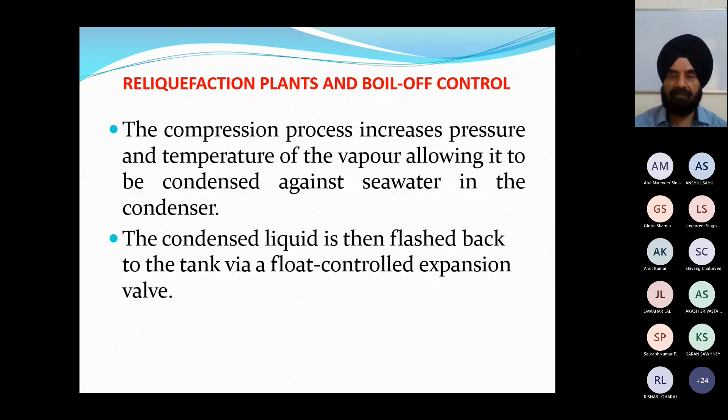And the returned liquid or the vapor mixture, it may be slightly, not completely converted to liquid, but this mixture to the cargo tank is either distributed by a spray rail at the top of the cargo tank or taken to the bottom of the tank to discourage more revaporization, depending on whether tank is empty or full respectively, because sometimes we do spray it to vaporize to cool the tank, but here it is basically to reduce the vapor pressure to convert these vapors back into the liquid.

Two-stage direct cycle. If you see this is also similar but slightly different, where the two-stage cycle with interstage cooling is used, where suction pressures are low and as a result compression ratios are high.

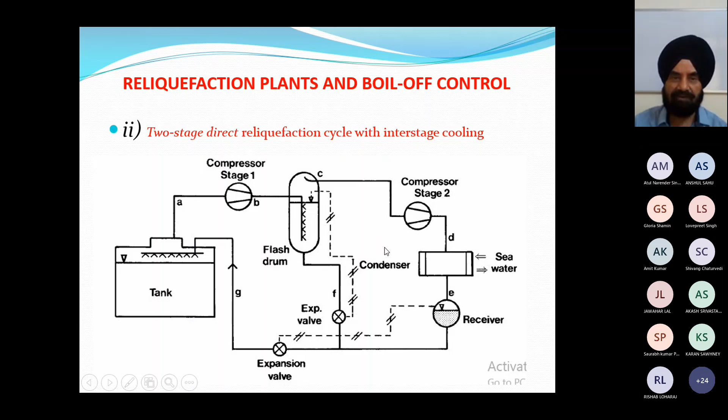So यहाँ पे भी same thing, vapors drawn up to the compressor, then they go to the intercooler where it is again cooled through part of this cargo, only part of this liquid it is cooling here and part of the liquid going back. So from here again the vapors are taken to stage 2 compressor, where it is again cooled through a seawater condenser, and then as a liquid, part of this liquid goes to cool the intercooler and rest of the liquid goes back to the tank. So this is two-stage direct reliquefaction cycle.

Two-stage compression with cooling between the stages is therefore sometimes necessary to limit compressor discharge temperatures, which increase significantly with the increasing compression ratios. Vapor from first stage discharge is taken to an intercooler where its superheat is removed, and then it goes to the second stage, and cooling medium is cargo liquid in the intercooler, flashed down to intercooler pressure from the seawater cooled condenser, and remaining parts of the cycle are similar to the single stage.

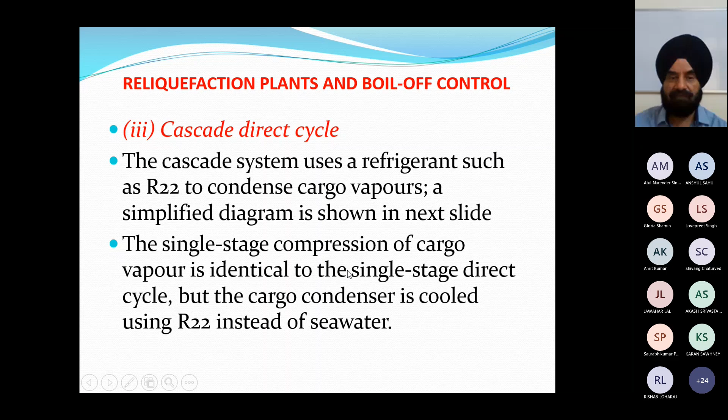Cascade type is another direct cycle system where another refrigerant is used to condense the cargo vapors. Instead of being seawater cooled, another refrigerant is used, and the single stage compression of cargo vapor is identical to the single stage direct cycle. So instead of cooling this condenser by seawater, it is cooled by another refrigeration system, another compressor which is seawater cooled, and this refrigerant is basically cooling this condenser so that even the superheat generated is well taken care of in this condenser instead of just cooling by seawater. This is called the cascade type reliquefaction cycle.

These three direct reliquefaction cycle systems are the most common, and one of them is fitted. Of course, it is very basic and simple in concept, but it's quite complicated machinery that engineers take care of. It looks simple, but this is the basic knowledge expected from us, that when you are working as a chief officer, you have a fair amount of idea what this reliquefaction system is and how it takes place.

So in cascade, the cargo condensing liquid evaporates, that is your Freon 22. Vapors are then taken through a conventional closed refrigeration cycle, condensing against seawater. Cascade cycle is used for fully refrigerated cargoes, so again it depends how much we have to load. But here another thing is that the plant capacities are not so affected by seawater temperature changes as per the other reliquefaction cycles.

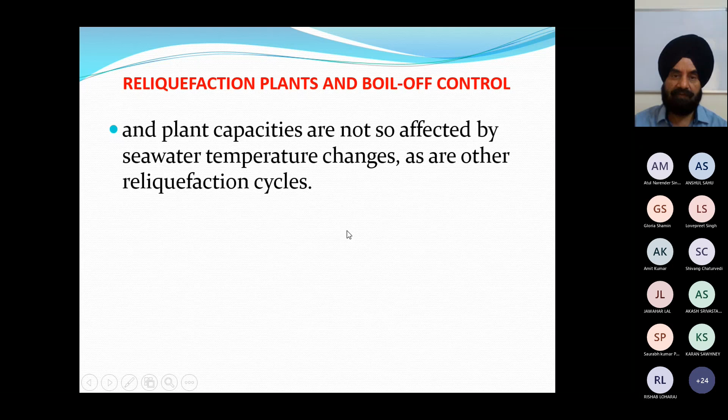On tankers, when the tanker comes from a yard, we inspect the tanks, inert them, and then do the loading. But here the steps are a bit different. Now, the tanker coming from the yard: first is tank inspection, then drying, then inerting, then gassing up, cooling down, and then loading. So it is not that immediately we come from the yard, inert the tanks and start loading.

First of all, preparation for loading is the tank inspection. So before any cargo operations are carried out, it is essential cargo tanks are thoroughly inspected for cleanliness, all loose objects removed, and all fittings properly secured. This is normally done before we come out of the yard, so all this inspection is done already. But now your tanks are absolutely at ambient temperature with normal atmosphere inside.

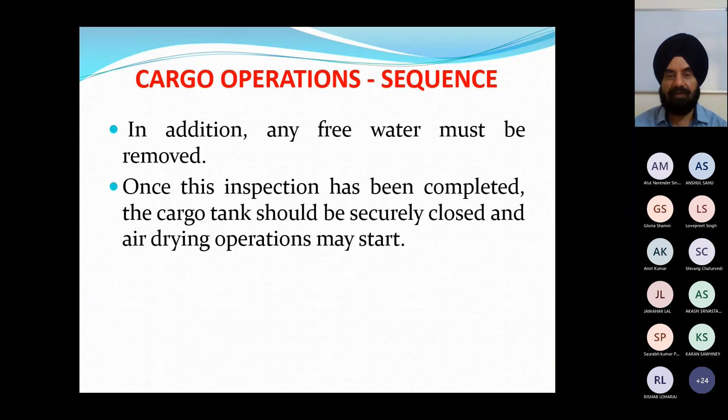Now in addition, any free water must be removed, so when we are checking cleanliness, no water should be present. Once this inspection has been completed, the cargo tank should be securely closed and then drying operations may start.

Now the second step is drying. Drying the cargo handling system in any refrigerated ship is necessary because we don't want any water vapors - no hydrate formation should happen. This means water vapor and free water must all be removed from the system. If this is not done, residual moisture can cause problems with icing and hydrate formation within the cargo system.

Tank atmosphere drying can be accomplished in several ways, described as: drying using inert gas from shore, drying using inert gas from the ship's plants, or onboard air drying systems, whatever is fitted.

After drying comes inerting, of course to remove oxygen from the tanks because we are going to load a cargo whose vapors can make a flammable mixture. So it is necessary that we remove the oxygen from the tanks - this is what we call inerting. Inerting cargo tanks, cargo machinery, and pipeline is undertaken primarily to ensure no flammable condition exists during the subsequent gassing up with cargo.

And to do this, oxygen concentration must be reduced from 21% to about 5-6%, to be on the safer side.

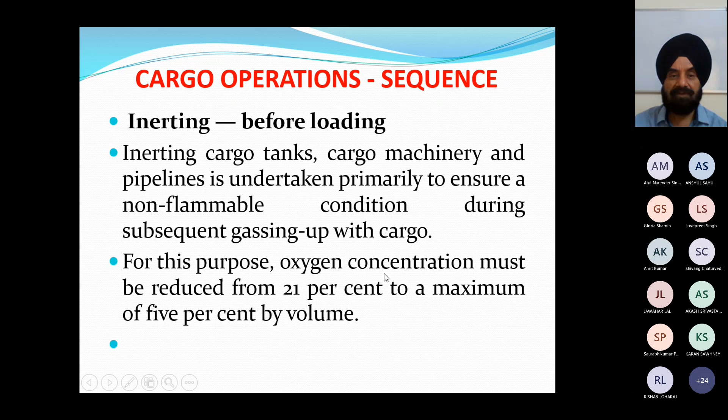So now inerting is done. What have we done through inerting? We have introduced nitrogen and carbon dioxide. Tanks are dry and oxygen is also removed. But the next problem is this nitrogen and carbon dioxide - these gases cannot be condensed by the ship's reliquefaction plant. Now when we do cooling, we need to condense the vapors, but these will not condense. So we have to remove this also from the tank.

So how is this done? This is because at cargo temperatures, each gas is above its critical temperature and therefore incondensable - both carbon dioxide and nitrogen. So removal of this inert gas from the cargo tank is necessary. This is achieved by what we call gassing up - using the vapor from the cargo to be loaded at ambient temperature and venting the incondensable gas to atmosphere so that subsequently the reliquefaction plant can operate efficiently.

So we introduce the cargo at a slow speed, and when it enters it will immediately get vaporized because your tanks are warm enough. These vapors will start collecting in the tank, and finally this vapor pressure will remove your inert gas, which is vented out.

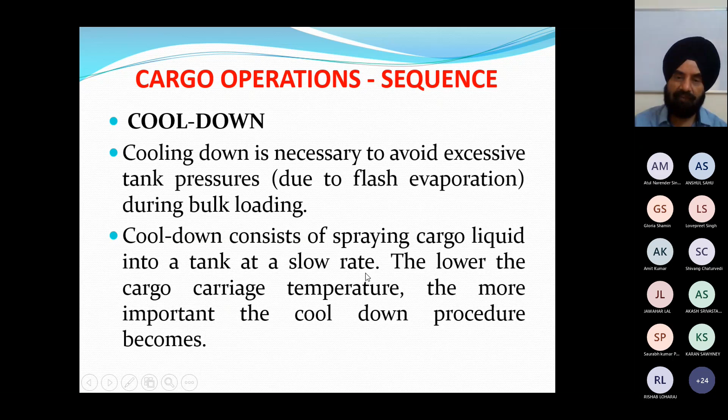So cooling down consists of spraying cargo liquid into a tank at a slow rate to lower the cargo carriage temperature. The more important thing is the cool down procedure, which is sometimes written in your manuals, stating at what rate you are supposed to cool down your tanks. Before loading a refrigerated cargo, ship's tanks must be cooled down slowly to minimize thermal stresses. The rate at which a cargo tank can be cooled without creating high thermal stress depends on the design of the containment, and typically it is about 10 degrees centigrade per hour.

Now if I have to cool down from 20 degrees to minus 100, at least 12-14 hours the ship will be idle, just cooling down the tanks alongside. So initially this has to be done.

After that we have a different process. The ships are on the same cargo, same run, but for initial cooling, the reference should always be made to the ship's operating manual for the cooling down rate, at what rate we should cool down these tanks. So this process is simple.

The cargo liquid from the shore is gradually introduced into the tanks, either through spray lines if fitted for this purpose, or via cargo loading lines. And the vapors produced by rapid evaporation may be taken ashore or handled in the ship's reliquefaction plant.

As vaporization happens, it will cool your tank as well, because the vapors are cool. The excessive vapors we reliquefy, and they are taken ashore. Meantime these vapors will keep cooling your tank, and we do not let extra pressure generate due to too much vaporization.

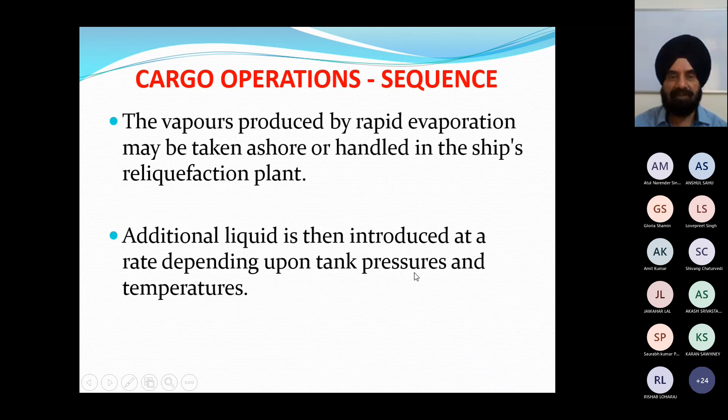So slowly, when your tanks are cooled down, a stage will come when you introduce that liquefied gas and it is no longer vaporizing. As the temperature cools down and the tanks come to that temperature, you will find the liquid starts remaining as liquid, and you start getting an indicator on your gauges that the cargo is retaining in the tank.

So cool down should continue until the boil off eases and liquid begins to form in the bottom of the cargo tanks. This can be seen from the temperature sensors throughout the cool down.

Deep well pump shaft should be turned frequently by hand to prevent pumps from seizing up or freezing up. Once the cargo tanks have been cooled down, the cargo pipeline equipment is accordingly cooled, and then we start the loading.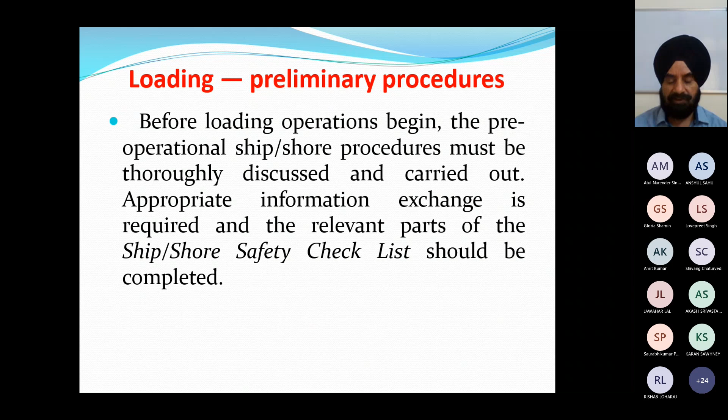Now for loading, again there are preliminary procedures before loading begins - pre-operational ship-shore procedures. Here too a ship-shore safety checklist is thoroughly discussed between the ship and the terminal and carried out. This is extensive, all checks are carried out before loading starts.

So particular attention is paid to the setting up of the tank relief valves and high alarm pressures, remotely operated valves, reliquefaction equipment working correctly, gas detection systems working correctly, alarms and controls, and the maximum loading rate.

The terminal should provide necessary information on cargo, including inhibitor certificates where inhibited cargoes are loaded, and any other special precautions for specific cargo should be made known to the ship. This goes both ways, ship and terminal both. This information exchange happens through the checklist, and even the ballast system for gas carriers is totally independent, so we can simultaneously deballast while loading, with ship stability and stresses maintained as planned.

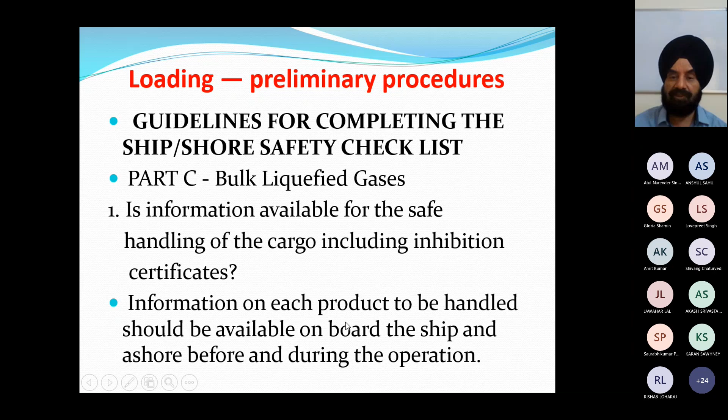Guidelines for completing the ship-shore safety checklist are similar to what we do on tankers. The guideline tells us what information should be available for safe cargo handling, including inhibition certificates, information on each product, MSDS, and it should be in written format, also including storage plan, description of physical chemical properties, and action to take in the event of spills. This is important because in case some mishap takes place, we know how to handle it.

Countermeasures against accidental personal contact, firefighting procedures, and what media to use. Procedures for cargo transfer, gas freeing, ballasting, tank cleaning, and changing cargoes, and special equipment needed for safe handling of the particular cargo, minimum allowable inner hull steel temperatures and emergency procedures.

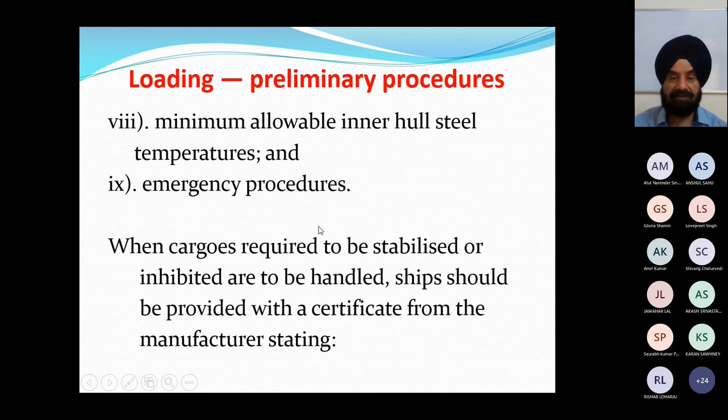Of course, when inhibited, the certificate should be with us, its name, amount, shelf life, whether it will stand the duration of the voyage, and action to be taken should the length of voyage exceed the effective lifetime of the inhibitor. So all this information should already be with us.

Is the water spray system ready for use? In cases where flammable toxic products are handled, the water spray system should be regularly checked, and during operation the system should be kept ready for immediate use. These are standard procedures which people working on gas carriers are normally familiar with and do.

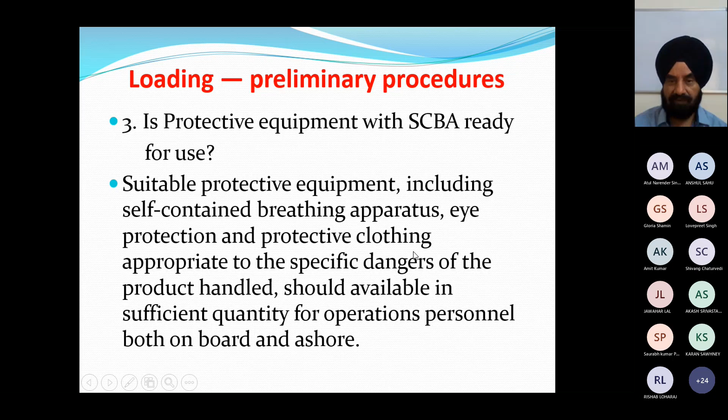Again, protective equipment, SCBA, suitable protective equipment, self-contained breathing apparatus, eye protection, protective clothing. That's why these ships work in a safer way, because we keep all this equipment ready every time. Storage places for this equipment should be protected from weather, clearly marked, and personnel directly involved in the operation should utilize this equipment and clothing wherever the situation requires. The first thing is our equipment, our clothing, our PPE. So before handling these cargoes, personnel required to use breathing apparatus should be trained. For everything, the ship's people who work are regularly going through this, so they are well aware of it.

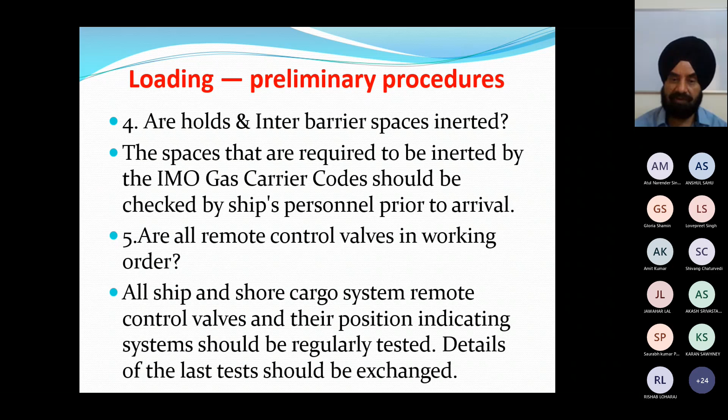All holds and interbarrier spaces also inerted, this check is also necessary. Spaces that are required to be inerted should be checked by the ship's personnel. Remote control valves, ship and shore cargo system remote control valves, and their position indicating system should be checked.

And of course alarms and sensors, we regularly keep checking. Cargo pumps, compressors in good order, having minimum or maximum working pressures to be agreed. Agreement in writing should be reached on maximum allowable working pressures in the cargo line system during operation, like the loading rates that are decided beforehand at this rate, and continuous watch is kept.

Reliquefaction or boil off control equipment is working even while loading. Sometimes excessive vapor generation takes place because temperature will fluctuate. If you are loading cargo at -100 degrees, by the time we load, slight temperature rise causes the cargo to boil off. If this boil off is not taken care of, you will find excessive pressure generating in the tank. So it should be verified that reliquefaction and boil off control systems are functioning correctly prior to commencement of operations.

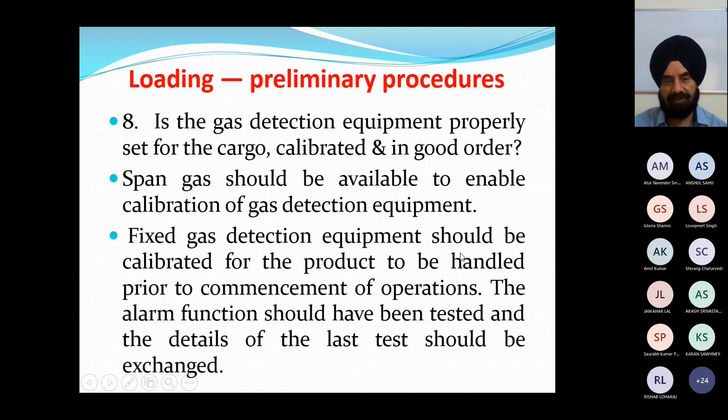Gas detection equipment properly set. Span gas should be available. Calibration of the equipment and fixed gas detection system should be calibrated for the product to be handled. Portable gas detection instruments, no need to mention, we all know portable instruments capable of measuring inflammable range should be calibrated for the product.

Cargo system gauges and alarms correctly set and in good order. Ship shore cargo system gauges regularly checked. And again the different level alarms should be set to the required level.

Emergency shutdown - in case we have high level alarms and the level comes, if something is on emergency, it is shut down on an emergency basis, then what action to take. Ship and shore emergency shutdown systems should be tested before cargo transfers take place.

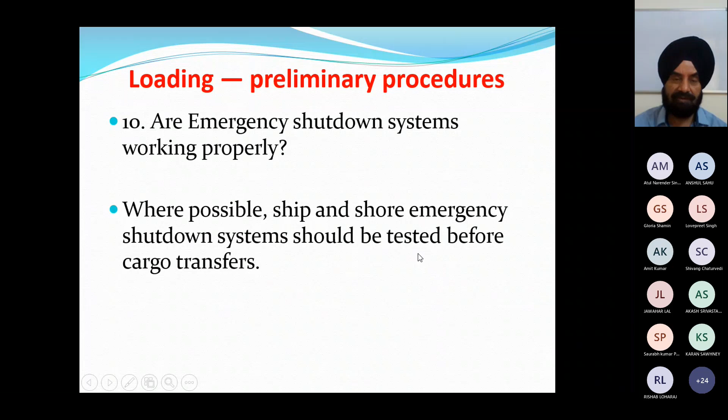The shore also exchanges information, they know the closing rate of the ship's automatic valves, and automatic shutdown valves may be fitted on both the ship and shore side. The action of these valves can be automatically initiated once a certain level is reached. So before that happens, of course, we stop cargo, we don't let this automatic system shut down. Again, the loading rate depends on this.

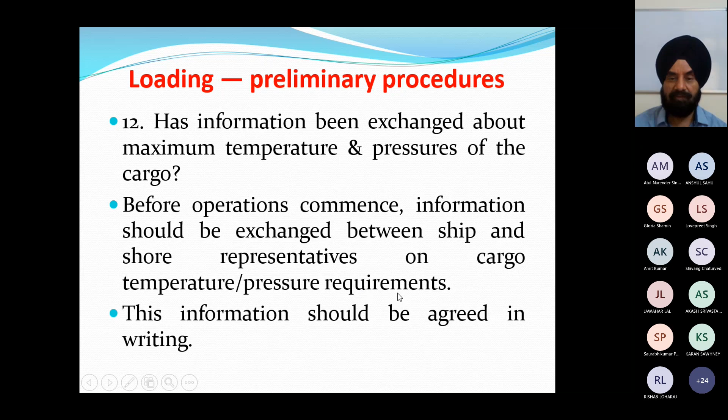And safe cargo handling rate should be noted in this agreement. Information being exchanged about maximum temperature and pressures: before operations commence, information should be exchanged between ship and shore on cargo temperature and pressure requirements. Cargo tanks protected against overfilling. Of course, we have the alarms, and the automatic shutdown system also works.

Compressor room properly ventilated, motor room pressurized, and alarm system working. Fans should be run at least 10 minutes before cargo operations commence and then continuously during cargo operations. So compressor rooms are important. Reliquefaction plant is operating. Audible alarms.

Cargo tank relief valve settings, and their maximum relief valve setting is also increased slightly initially. In cases where cargo tanks are permitted to have more than one relief valve setting, it should be verified that it is set as required by the cargo to be handled. And relief valve setting should be recorded in the checklist. Trim, stability, stress, of course, we check before loading. Your cargo planning is done.

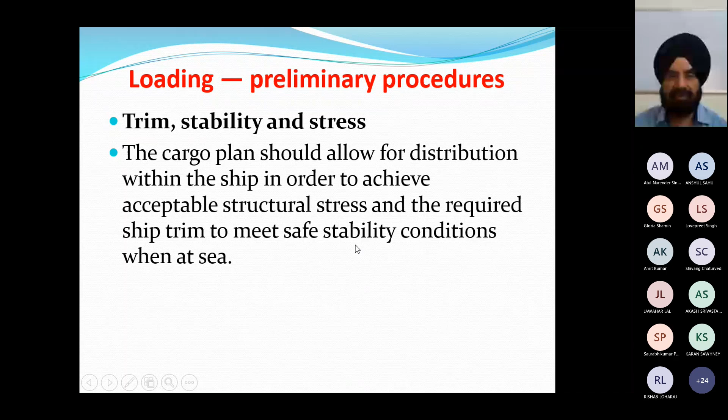Sloshing: a further point to be noted in respect of tank filling level is that large prismatic cargo tanks, due to their width and shape, may suffer from substantial sloshing of cargo in heavy pitching or rolling conditions. So normally we keep these tanks full up to a certain level so that during sloshing or rolling and pitching no damage takes place. If we keep the tank full, less damage. If the tank is half empty, more damage, because liquid will go from one place to another and can damage any structure.

So such tanks, and particularly membrane type tanks which have no centerline wash bulkheads, may have prohibited filling levels in order to avoid damage to the tank structure. So typical controls on such tanks are a prohibition on all filling levels between 10 and 80%.

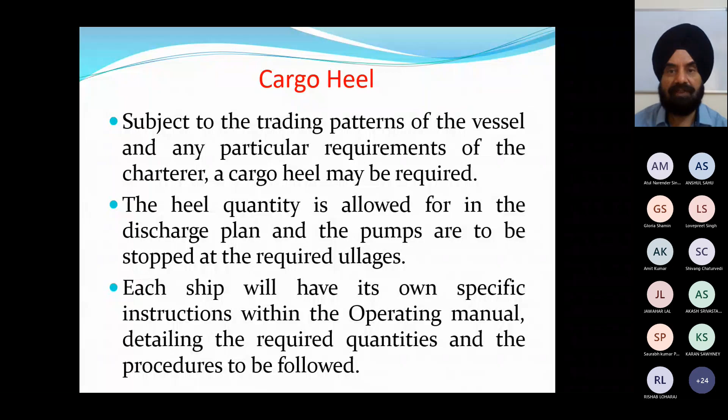Now comes cargo heel; they sometimes ask about this too. What is cargo heel? As we have seen, we are spending a lot of time in cooling the tanks. Once is fine. But if every time the ship has to spend 12, 14, 16 hours for cooling, then it is not a viable project. So to keep your tanks cool, subject to the trading patterns of the vessel and particular requirements of the charterer, cargo heel may be required.

Cargo heel is a quantity allowed for in the discharge plan, and pumps are to be stopped at the required levels. That means a certain amount of cargo is retained in the tanks so that your tanks remain cool. Each ship will have its own specific instructions within the operating manual detailing the required quantities and procedures to be followed. This heel figure should be carefully calculated to ensure maximum outturn of cargo at the discharge port, consistent with being able to arrive at the load port with tanks cooled down by the onboard retained heel.

So this part of the cargo is again between the charterers. Now it's the same charterer, they know. So they keep a certain part of the cargo which keeps the tanks absolutely cool. Retention of heel is subject to much discussion. On membrane vessels on shorter ballast voyages, it is acceptable to carry a small amount of heel in each of the cargo tanks, and generally this will maintain the tank bottom temperature sufficiently cool. So when you come to the load port, you don't have to spend so much time on your tanks.

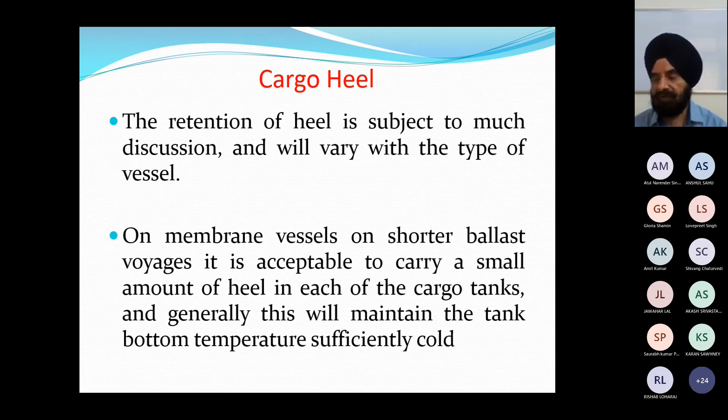So this is what we call the cargo heel, and its amount varies charter to charter, and the vessel is able to berth and commence loading without additional tank cool down being necessary. On longer voyages, it is usual for heel to be retained in one tank with the others heeled out, and additional spraying may be necessary when cargo tank temperature is higher than your arrival temperature requirements.

Terminal requirements are also followed, the intention being for the vessel to arrive without the requirement for extended cool down and delays at the load port. On long ballast voyages with large quantities of heel retained in one tank, it is essential the quantity of heel carried does not normally exceed about 10% of the tank height. Again, there is sloshing, which we have seen. So we have to keep that much that it does not do any damage to the tank, and the amount is also sufficient to keep my tanks in a cool down condition.

So these were your various procedures, the various things we do on these gas carriers. So please go through this.

क्वेश्चंस आपको बता दिए कि यस हैजर्ड्स ऑफ गैस कैरियर्स, रीलिक्विफिकेशन प्लांट, इसके ऊपर भी क्वेश्चंस रहते हैं, एंड टाइप्स ऑफ गैस कैरियर्स, what are the various types of gas carriers, containment system. I think this is, if you can go through, not so difficult, and people who are working, so they also have a tendency to attempt this gas carrier.